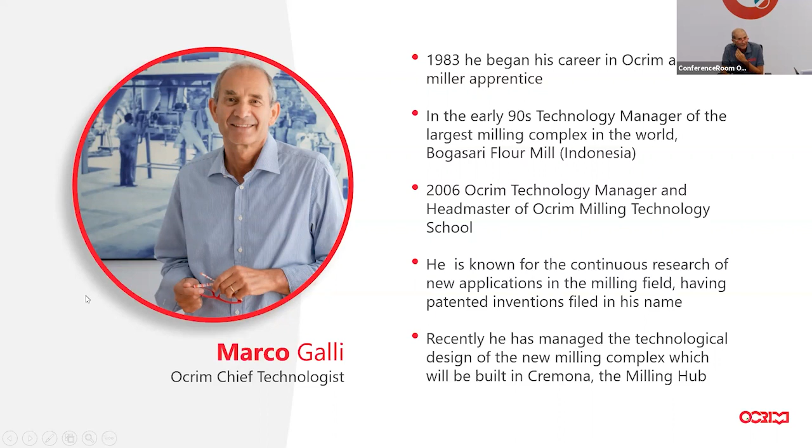As anticipated by Anna, today I would like to introduce this new concept about the modular mill concept with some highlights on how this concept works. I hope you will enjoy this hour with us, and in the end we will be happy to attend questions in this seminar. So, in order to understand the principles behind this technology, it's important to understand and analyze the tendency that we have in today's market.

Because this will drive certain tendencies, and then we have to understand also why we have those tendencies. So, the analysis that we did and the evaluation behind this analysis are showing that high capacity plants are one of the trends worldwide.

Why do we have this tendency and why is the market moving in that direction? The main reason is overhead cost reduction, which is one of the main drivers in today's mill production or mill industry. Overhead cost reduction involves many segments. Just a few examples: manpower, energy cost, production, productivity, maintenance. Those are just some examples that together complete the overall cost on the plant.

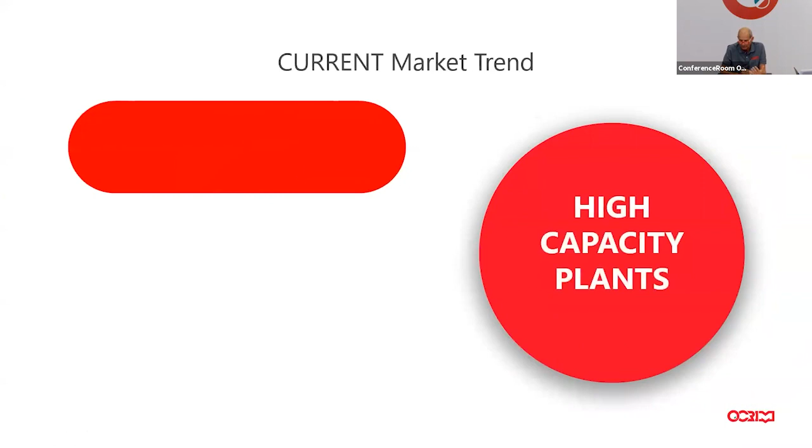And this is something that with the technology we have today, we can help to reduce. So entering into details and showing some indications, we could start from manpower cost. We all know that the ratio between a mill's capacity and manpower is less in a big mill. This means that a big mill has less personnel related to capacity compared to a small mill. And the reason is very simple, because we can optimize the resources, the people and the manpower.

This is one reason why higher capacity plants become more attractive. Roughly speaking, depending on the region, the cost related to manpower is rated between 8 to 16%, without considering the raw material cost. So any reduction we achieve in this segment could be an important reduction.

Another important point is maintenance and maintenance cost related to production. Considering the initial investment to build a new plant, it's important to maintain that plant in good shape along the years. To do that, we need maintenance periodically, but everybody knows that sometimes we have to compromise between maintenance and production, because production needs to satisfy market demand. So we know that if we don't do maintenance, the plant may not perform as expected, and reliability and performance could decrease. So it's a trade-off, a balancing between these two aspects.

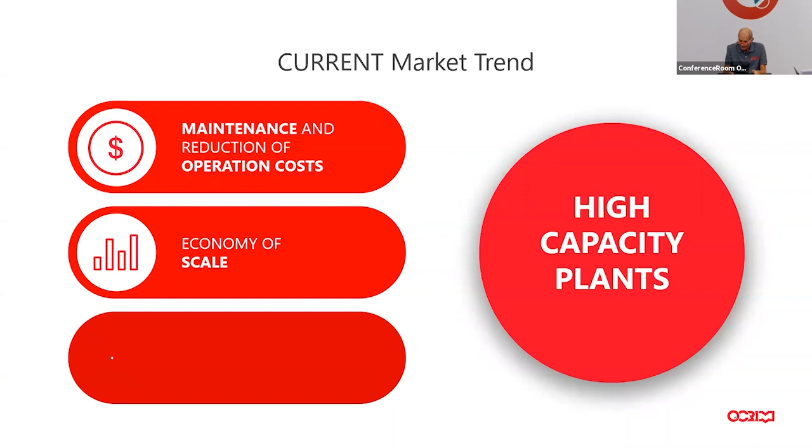Another point is that in order to have very reliable production, a large mill needs some help to run smooth. What do we mean by run smooth? We need a consistent finished product and reliable production. To obtain that, we need some help - help that today's technology can provide to operators and millers to accomplish these tasks.

This is possible by joining automation together with digitalization and the Internet of Things. One example could be a production change.

Automation could help reduce the time for the miller's activity during these changes. At the same time, it will guarantee that the procedure to change from one production to another has been done properly, without any human mistake or human error.

Digitalization comes in when data is important - for example, extraction rate, or all the data related to the new production and its target. This tells us when we are okay, when our flour is already respecting all the parameters or specifications.

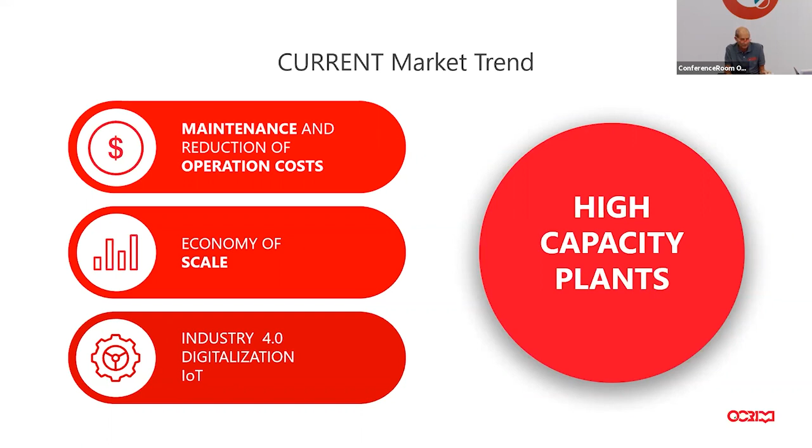Those technologies we briefly mentioned are what we're using today in a recent plant we built with a capacity of 1,200 tons, three times 1,200 tons. So it's not three single lines that together make 1,200 tons, but three times 1,200 tons, so 3,600 in total. As you may know, large or big mills also have some limitations.

Stopping the mill for any reason is always a concern, but as we saw in the beginning, we need to do maintenance if we want to keep performance, productivity, and so on. For example, we need to stop the mill to change socks in the filter, change rolls, or do periodical maintenance in sifters - cleaning and inspection. And with today's technology, we have to stop the whole mill just to do this maintenance or these activities.

When we stop the mill, no matter the reason, it's a cost that leads to lost production, or a loss of opportunity to produce more with less - opportunity to optimize time, optimize manpower, create new markets. All these points drive to profit loss, because when we lose something, in the end we lose profit. Consequently, this impacts the economical balance and, in the end, reduces competitiveness.

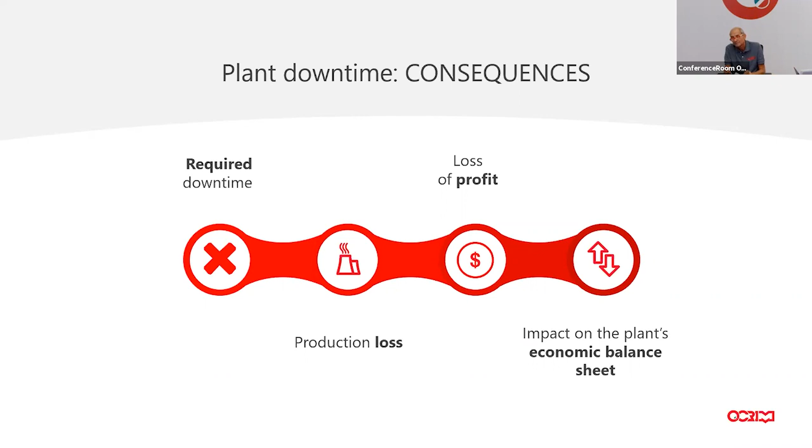So those are the trade-offs between high-capacity mills - the benefits and the concerns we have. In fact, those are the pros and cons of high-capacity mills. This balancing is the reason behind our idea to develop this new modular mill concept. Our goal in the end is very simple: to maintain all the benefits of a large single line without the limits that we have with a single line. So we try to limit any impact related to the concerns we have with high-capacity single lines.

Another goal of the modular mill concept technology is to simplify the daily activity in a flour mill, increasing productivity and consequently the economical balance. Before explaining in detail what modular mill concept is, it's important to understand what it is not, because there are some misinterpretations. So we will start with what modular mill concept is not.

It is not a combination of two single lines. For example, we are not considering two times 300 tons independent lines to have in the end a 600 tons per day line. It's not two single lines with a common cleaning system, or two single lines with a common finished product collection. We are not saving some blowing lines and screw conveyors—that's not the idea. It's not the technology that allows two different types of wheat to run at the same time. We are not talking about two lines. This is not the technology that allows the mill to run economically at low capacity. A 600 tons mill has to run the 600 tons.

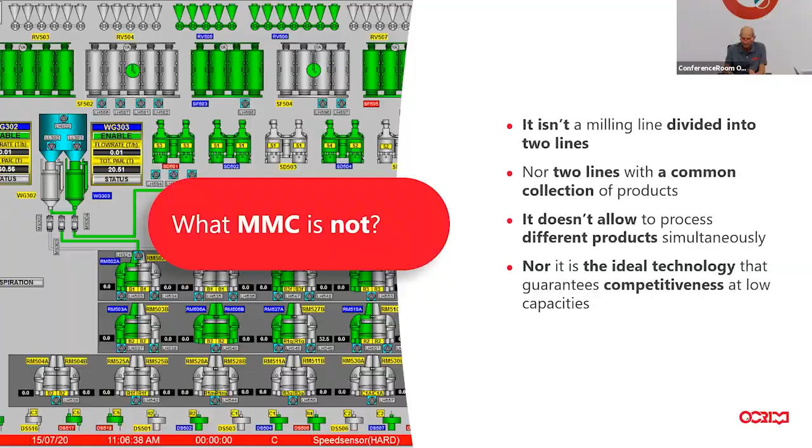So in conclusion, we are not considering any type of two single lines, but we are introducing a new concept for a high capacity single mill. So, what is modular mill concept, and what makes this technology so unique?

Basically, modular mill concept is a single line—back to the example before, a 600 tons line divided into 3 groups interconnected to achieve full capacity. So if I want 600 tons, I have to have all 3 groups working together. The 3 groups consist of 2 independent groups, which we call group 1 and group 2, and 1 common group, which we call group number 3.

With this configuration, the modular mill concept allows us to stop alternately one of the 2 independent groups, enabling the system to run at 50% of its full capacity without any impact on the remaining group of the mill, and of course without any impact on the finished product. When I say no impact on the finished product, I mean no impact on ash content, extraction, and so on. We just stop one part of the mill while the rest is still running.

Vice versa, when we stop the common group, the whole mill will be down. To clarify, when we say stop one of the 2 independent groups, we mean both suspending production and switching off the equipment related to that group. With the equipment switched off, maintenance can be easily done, all without any impact on the remaining group.

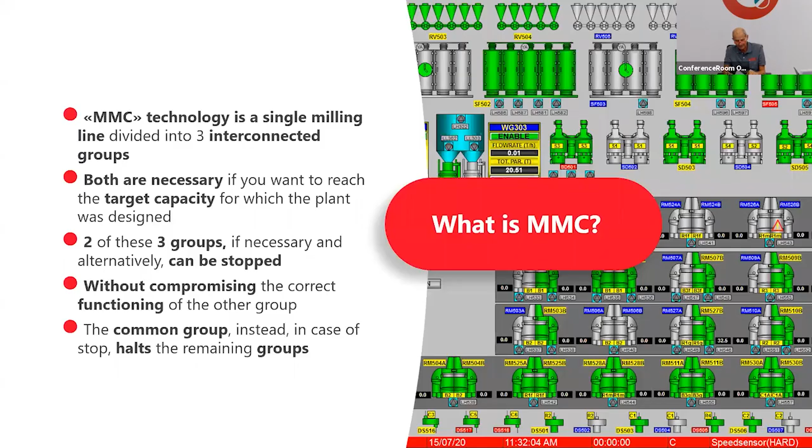Now we'll try to visualize this concept by comparing the modular mill concept to a gear wheel transmission. Here we can see, by different colors, group 1, group 2, and the common group. If, for example, we stop group 2, the blue one, we will still have group 1 plus the common group producing at 50% of capacity. On the other hand, if we stop the common group, the equipment, the whole mill will stop, as it does today.

The only difference is this: today, if anything happens in the mill, you stop 100% of the capacity. In our case, most of the time, if something happens, you will stop just 50% of your capacity. So I hope this starts to make clear how the technology works and the benefits we have.

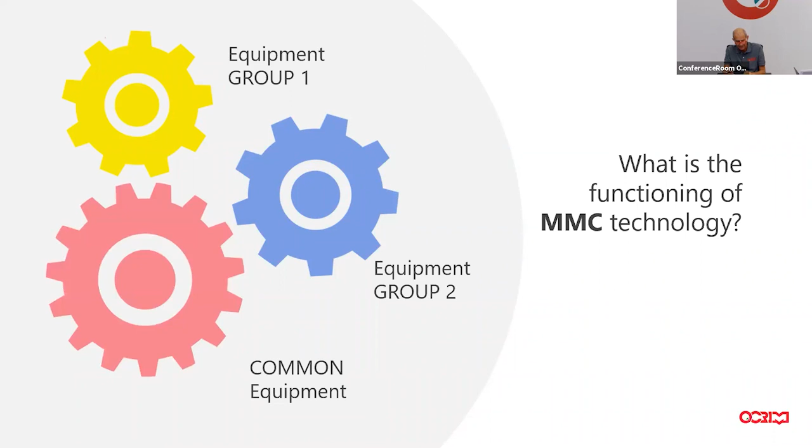Summarizing, the technology allows maintenance to be done in one part of the mill while other parts are still running, with the benefit of maintaining 50% of the target production. It's important to highlight that in this condition, all the sequences that drive to have 50% of the mill, 50% of the production, and maintenance at the same time—all the sequences, all the safety devices—are fully automated.

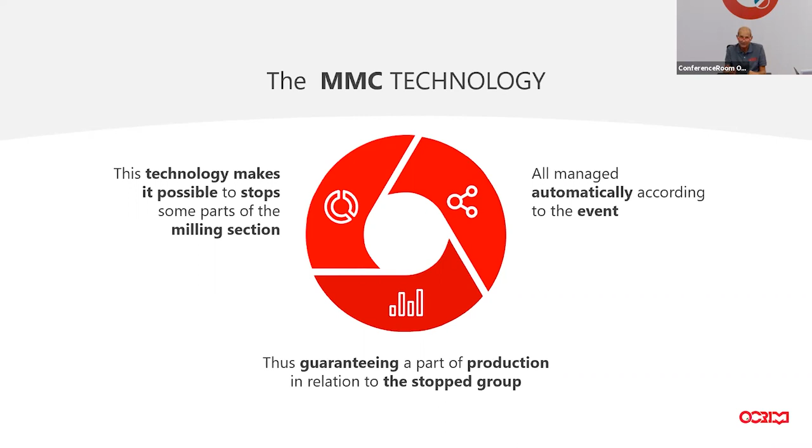In other terms, we have to respect and guarantee to the crew doing maintenance that nothing happens, and this is totally automated, without any intervention by the operator. So any event that happens in the mill will react by itself. The operator does not have to be present all the time to follow what happens in the mill. This is, I think, a really important step in allowing the operator to do more activity and not just be concentrated on what is going on in the mill.

To clarify this concept even more, this slide shows how the equipment looks like under each group. This is an example where we can easily identify the three groups by color.

So yellow is the first independent group, blue the second independent group. When I say independent group, I mean that yellow can stop alone, leaving blue running, and vice versa, while the red one, if stopped, stops everything.

Considering the size of the mill, we can consider group 1 and group 2, also purifiers, bran finishers, equipment not shown in this drawing. The main concept in our technology is to stop the equipment or apply the modular mill concept to the equipment where we need to do maintenance—we have to stop totally the mill, sifter, filters, plants, and roller mill.

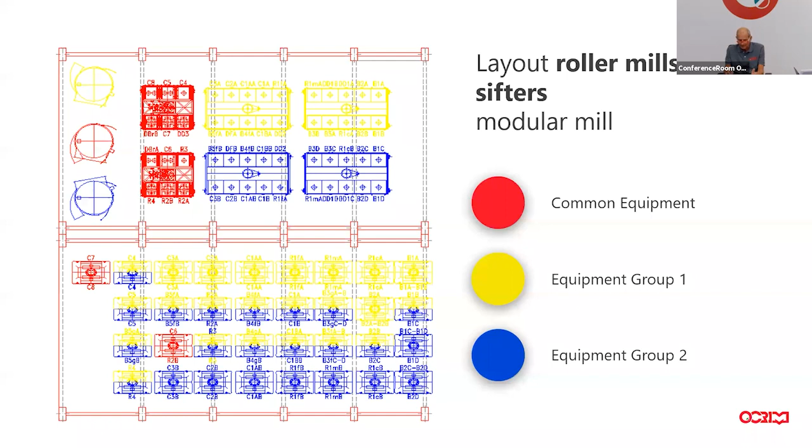As we said, with group 1 or 2, yellow or blue, at any moment we can stop and maintain a capacity of 50%. This is the main feature of the modular mill concept. And of course, with the red one, everything will stop—this is what happens in today's traditional mill.

One of our goals is to reduce as much as possible the equipment under group 3, to reduce by probability the need for maintenance and unforeseen stops related to group 3, so the probability is less compared to the other groups. We try to optimize what we have under group 1 or group 2.

Whenever we stop and run at half capacity, we are running without any impact on the finished product. This is really, really important to remind.

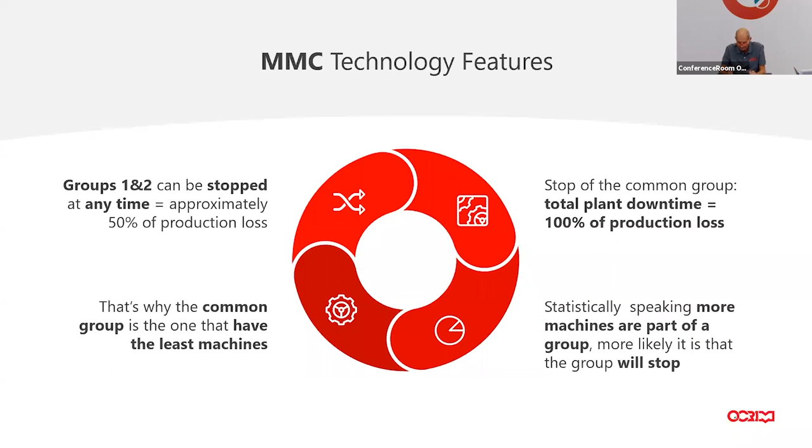As mentioned, the purpose of the modular mill concept is to have, during maintenance and unforeseen stops, at least partial production. Today, any shutdown, even one not correlated, creates a total production suspension.

One example to clarify this concept: during the maintenance of a sifter, millers never open all the sifters at the same time, especially in a big mill. Millers do maintenance on one, maybe two sifters, while all the other sifters stay stopped and nobody is doing maintenance on them.

The reason this happens is because there is not enough manpower to do maintenance on the whole system. Just imagine 600 tons, as we saw before—if we stop all the mill, we have 6 sifters where people are working on 2 and the rest are untouched.

With the technology we are proposing, we will have 2 sifters where people are doing maintenance and the other 4 are producing. They are producing, and they are reducing cost in the end.

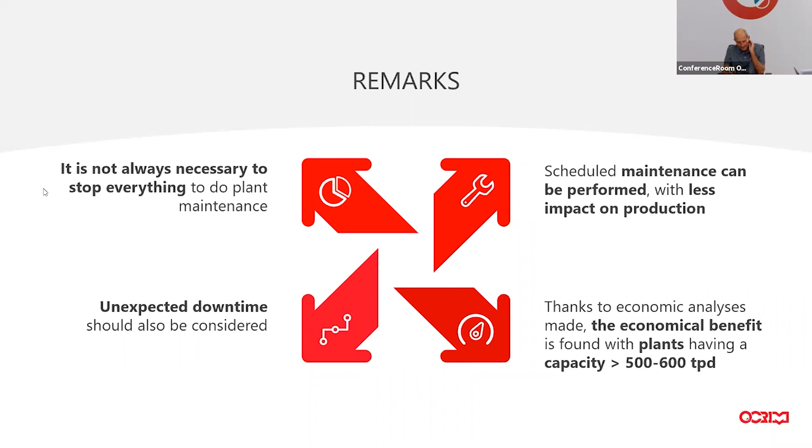We have some questions. The first one is half a consideration and the second part is a question. I agree with the economy of scale in the high capacity plants, but what about the wheat milling changes and the lost time adjusting machinery?

This one is right, but we will see in the next part of the presentation that this technology is balanced together with some equipment with new philosophy. The equipment itself has to be capable at least to give some indication to the operator on how it has to be set. For example, roller mill, we will see. We need to move also to the new standard equipment, the new features in the equipment.

Of course, if we apply new technology, also new equipment has to be applied together, because otherwise we will have some benefit, but as you mentioned, when we retrofit, when we have changes, we will lose time doing those changes in the production. But automation, digitalization, Internet of Things helps with that.

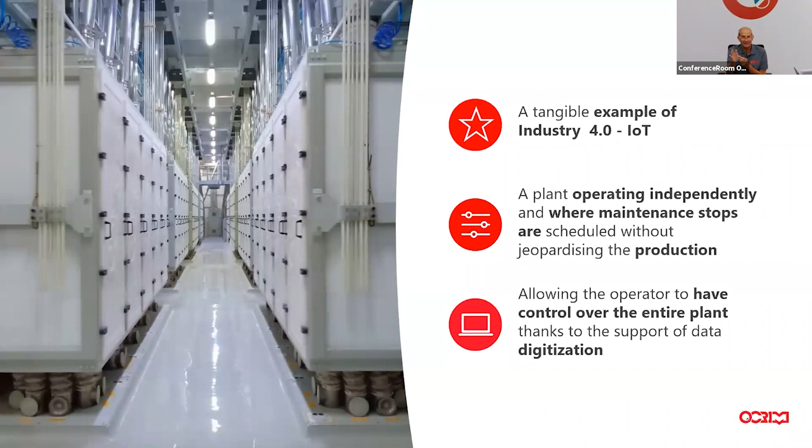Now back to the presentation. Just one small note - the picture we are seeing is a mill of 1,200 tons using the technology we are speaking about, just for your reference. So now back to the presentation - an aspect that for me is really important is the impact of Industry 4.0 in the modular mill concept.

Today, everybody is speaking about Industry 4.0. But I think this is a real example of how we apply Industry 4.0 to our industry. A mill where the operator supervises the mill and the equipment from anywhere just with a simple smart device.

The mill reacts according to an event without any operator intervention. A mill where it's possible to stop part of the equipment for maintenance while the other parts still run and produce. If we add to that real data exchange, like extraction rate, wheat and flour quality, quantity, stock monitoring, production planning, and equipment status or information, all these features, based on a friendly system that helps guide the operator to take the right decision in front of events and reduce potential human error, I think this is a good example of Industry 4.0.

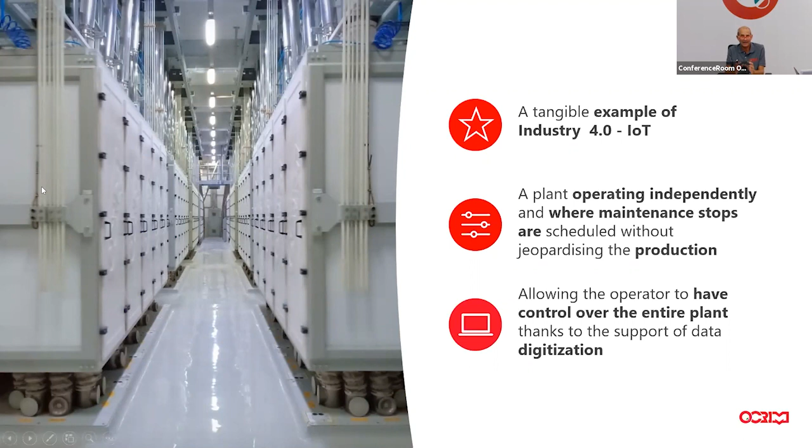Now, how do we achieve this concept? To realize this concept, we need to put together three items, three points: flow sheet, layout, digitalization, and equipment. Without the combination of these three elements, we cannot get the modular mill concept.

So, the flow sheet concept starts with how to load two single independent lines. We will start these two single lines with two independent scales, one for group 1, one for group 2. This is because if we need to cut the load, we can cut independently one from the other, allowing it to run at 50%. The second challenge is how to balance the load between these two groups.

Having a 50% load in group 1 and 50% in group 2, it's easy to understand that we can balance the load easily, while maintaining the quality of the flour for the finished product. The third key point on the flow sheet is reducing as much as possible the equipment under group 3, because reducing equipment under group 3 will reduce the possibility of stopping everything, stopping the whole mill for any reason, maintenance or unforeseen stop. So this is the third challenge, and this is all under the flow sheet.

The modular mill concept has a lot of benefit that is tangible, easy to see, and immediately seen. But we have other benefits that are not so clear. One example is the erection and startup. When we invest in a mill, the erection time and startup is always a concern because it's a quite long operational activity.

With the modular mill concept, we can reduce that time because we can do erection by phases, starting, for example, with group 1 and group 3, starting this part of the mill at 50% of capacity, and then concluding the erection with the second, independent group, to reach full capacity.

In our estimation, based on our experience, this capability allows us to reduce erection time and start production with a reduction of 20 to 30% in the time compared to a standard mill. This is another indirect benefit that this technology has.

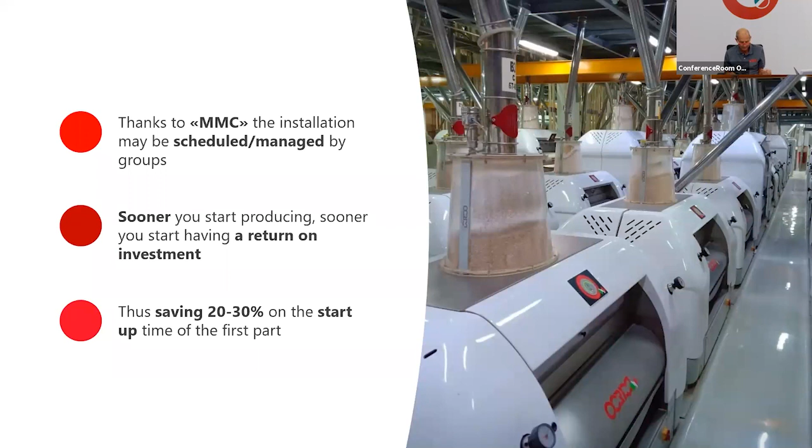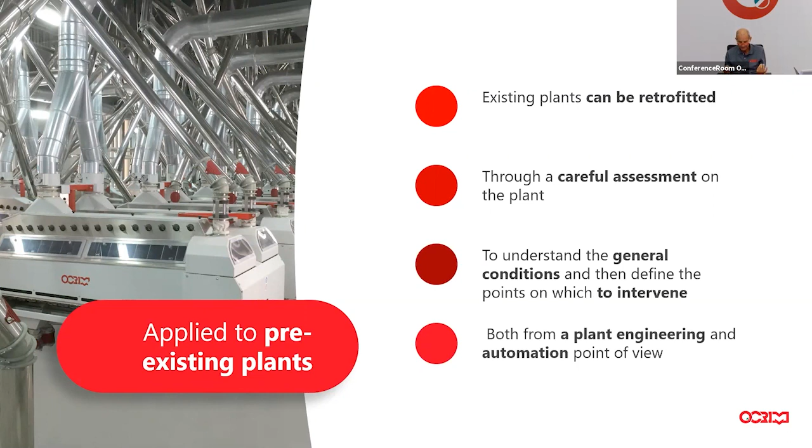Some of you are surely asking, can the modular mill concept technology be applied to existing plants? Yes, in principle, the technology can be retrofitted. Of course, a survey has to be done because we need to understand how the existing mill is, how the flow sheet is, how the automation is, and if the layout has any limitations. But in the end, in principle, yes, it could be done.

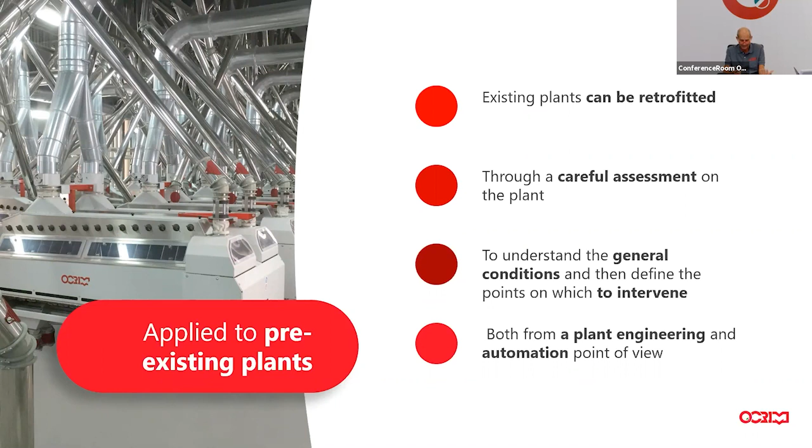Of course, it's something we have to sit together and understand, to figure out how we can monitor and to what point you can apply the modular mill technology to your reality. So we say many times that modular mill technology is nice, is good, and so on. Let's convert this into numbers.

Here we have a data sheet where we collect, for the two main groups - sifter, roller mill, and filters - the difference in maintenance, stopping time, and other expected downtime, between a standard mill and the modular mill concept. Those are indicated by hour, during the total stop in a year, related to 650 tons per day. I don't want to go into details of each single line, I just want to draw your attention to the last row, the 42% reduction, which is the average reduction considering all those items.

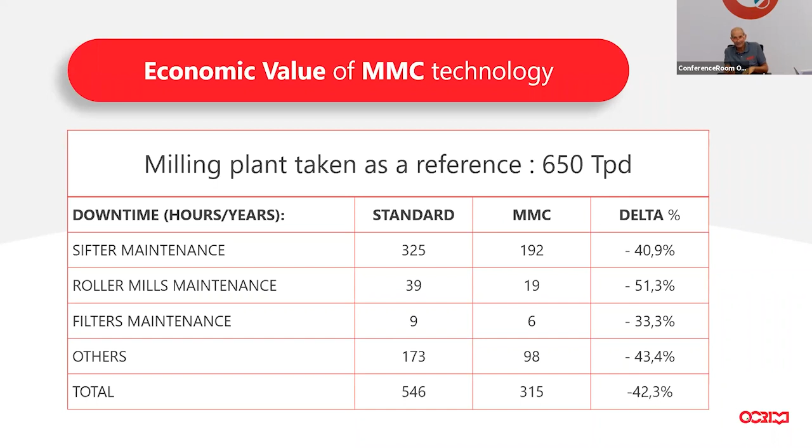And the 42% in that specific case drives to a saving in time, which is converted in production to about 10 extra production days under overall condition. So 10 extra days can be converted into economical assumptions. 10 extra days is about 6,500 tons per year more capacity, 5,000 tons more flour.

Considering 77% extraction, this is about 1.8 million more potential income with a flour price of 350 euro per ton. And this, assuming a revenue before taxes of 15%, drives you to 270,000 extra gross annual profit. Not bad, I think.

So the numbers are indicative, related to the European market, but they can change according to geographic region, cost of flour, and so on. But in the end, the concept is that we will still have the delta related to the modular mill concept.

So, in conclusion, all the numbers we have are, I am sure, conservative numbers. Maintenance hours - considering that the plant becomes old year by year, the time for maintenance will increase, so the benefit of the modular mill concept will also increase. The economical assumptions are based only on revenue from flour, not considering the byproduct, so we will have other income on that.